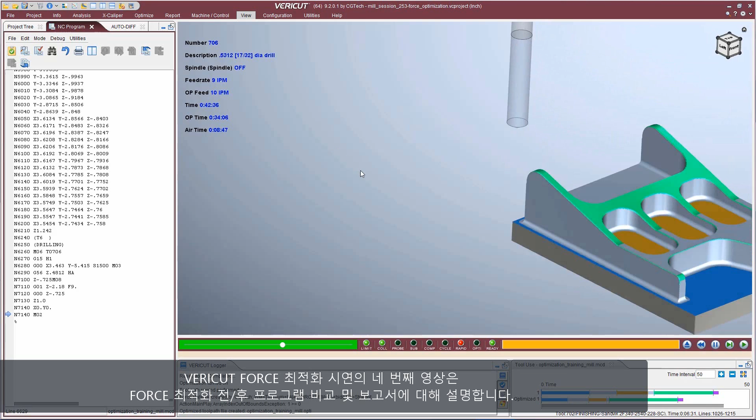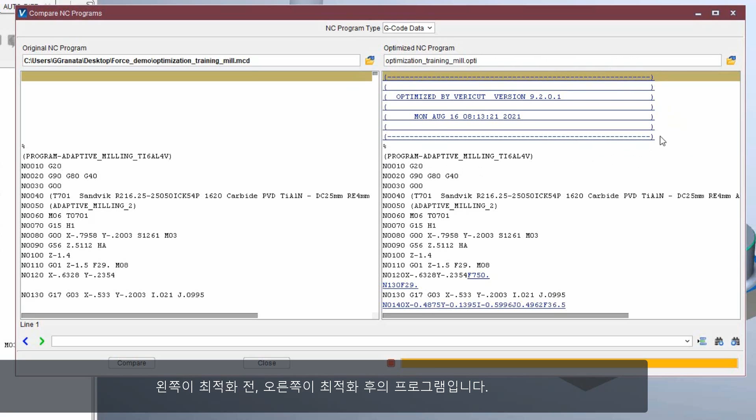You can do this through the Optimize tab and comparing the files. The file on the left is the original NC program. The file on the right is the output optimized NC program, as evidenced by this banner at the top of the file. So what I want to point out for you is, here is the original NC program feed rate for the very first operation of the very first tool, 29 inches a minute.

In the optimized side of things, we see that as well, but then the tool was in air, so it was increased automatically by Force optimization to 750 inches a minute while the tool's moving in air and not removing any material, and then slows down prior to engaging material.

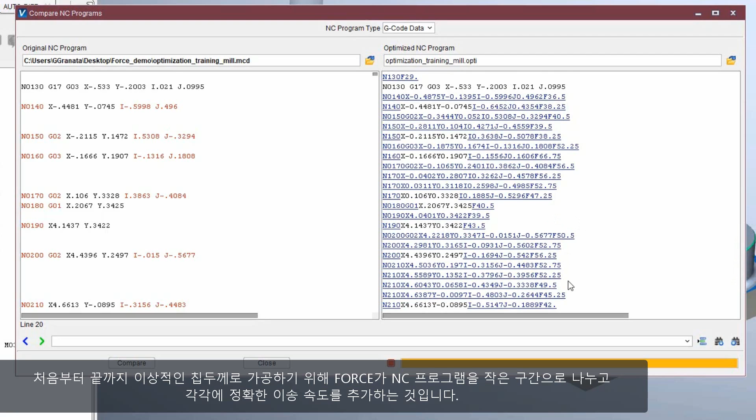But after that, look what happens with all of the feed rate scheduling that goes on and block breakup. This is the amount of subdivision that causes very precise, constant chip thickness at the ideal thickness you want for machining this material. Nothing like the program that came out of the CAM system. So that's what's causing all of the savings.

Some people think that by having all of this feed rate activity, that causes some erratic machine behavior. But in fact, what's going on is it's causing the machine spindle and the spindle load to run much more evenly than the original NC program.

So the benefit to the machine is significant, as well as the benefit to the tool life, keeping that constant chip thickness right where it needs to be for machining. We have our Force users reporting from 2 to 3 times tool life with Force optimized programs.

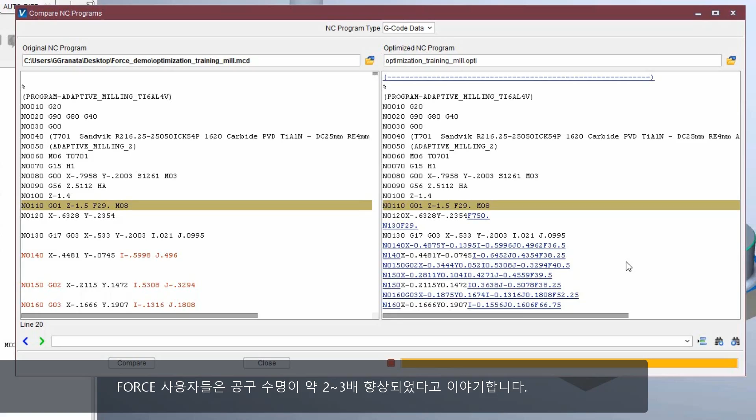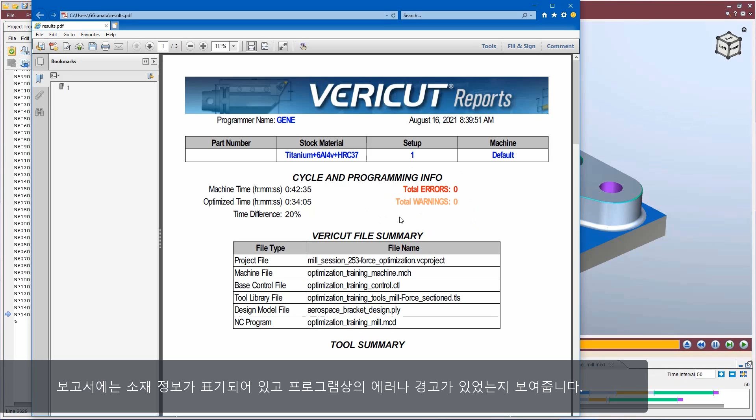Now VERICUT's reports are customizable, and this is just one of the templates that comes with the software, so I'll put my name in here and go ahead and save a report. What the report in this case will tell me is what material I was machining. Did I have any errors or warnings in my program? Earlier you heard me say it had already been verified to not have any, so I expected nothing there.

A summary of your savings, the files you used, and then here's a summary of the tools that ran and were optimized. Each one's listed by the description in VERICUT's tool library with a picture and where it was loaded on the machine or how it was called at the machine.

I've documented what the optimization settings were for each tool, and then it gives me the original runtime, optimized time, and the difference. So 45% savings, 22% savings, 43, 50% savings. You can see that the savings are dramatic in this case.

Now here's a tool which actually has a negative number reported, which you might think is odd. Well, what happened in that case is the tool was originally programmed too aggressively for the finishing operation it was scheduled to do. So what Force optimization did was notice that the chip thickness was too high, and it adjusted the tool feed rates downward to make it run properly and give the best finish that it could.

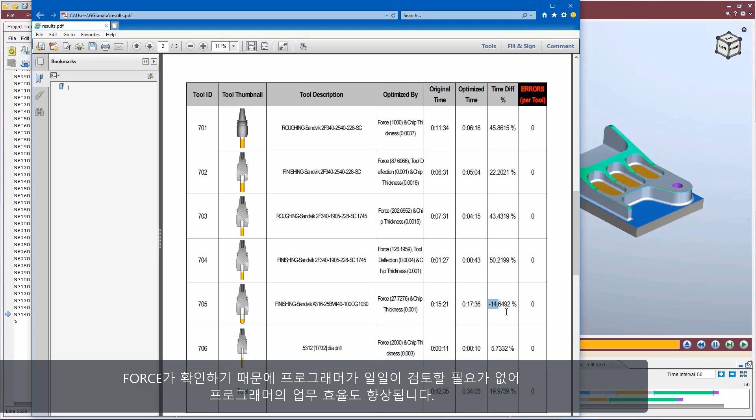And that's all of the green area that we see here. That's where that happened. So even though it's reported as a negative savings, it's significant for having the best part finish that's needed. And as a programmer, what's nice for me is I didn't need to keep track of that. Force just took care of that for me and took my roughing feed rate I had in there and fixed it. So that's a great savings for me as a programmer.

And down here we have the tool use bar, so you can get that same visual look that we saw here in VERICUT as a reference of how much savings there were. So a nice example of VERICUT reports.